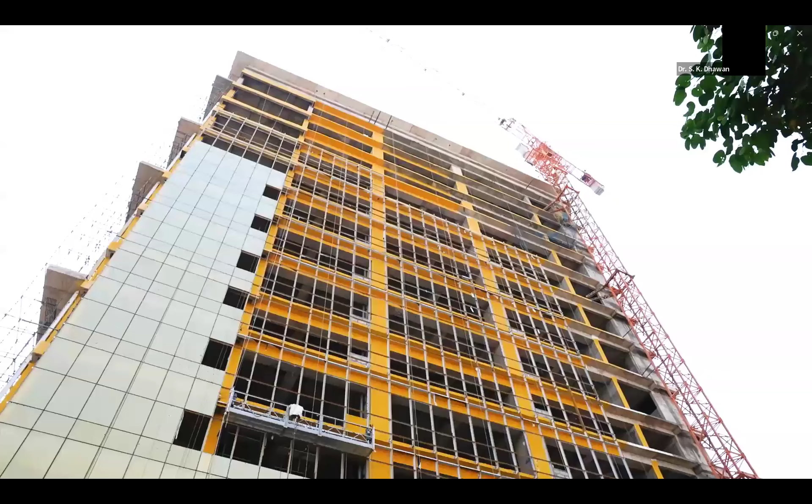The Indian Association of Structural Engineers, also known as IAStructE, was conceptualized and constituted in the year 2002 by a group of senior professional structural engineers from all over the country. IAStructE is registered under the Societies Registration Act 21 of 1860. IAStructE is a national apex body of structural engineers in India with a mission to promote the structural engineering profession and cater to the professional needs of the structural engineering fraternity.

In the short span of two decades, the association has attained an eminent position in the professional field. Its membership is valued very highly in the profession. Since inception, IAStructE has been led by eminent structural engineers like late Shri Mahendra Raj, late Shri Kumar Ghosh, late Shri Subhash Chand Mehrotra, Professor Mahesh Tandon, Shri Manoj Mittal, Professor R. Pradeep Kumar and Shri Alok Bhowmick as its president.

IAStructE is a permanent member of the Engineering Council of India and interacts with the government on professional and policy matters related to civil and structural engineers. To expand its reach, IAStructE has collaboration with various international professional like-minded associations and institutions like IStructE UK and FIB for strengthening global connections and professional exchange.

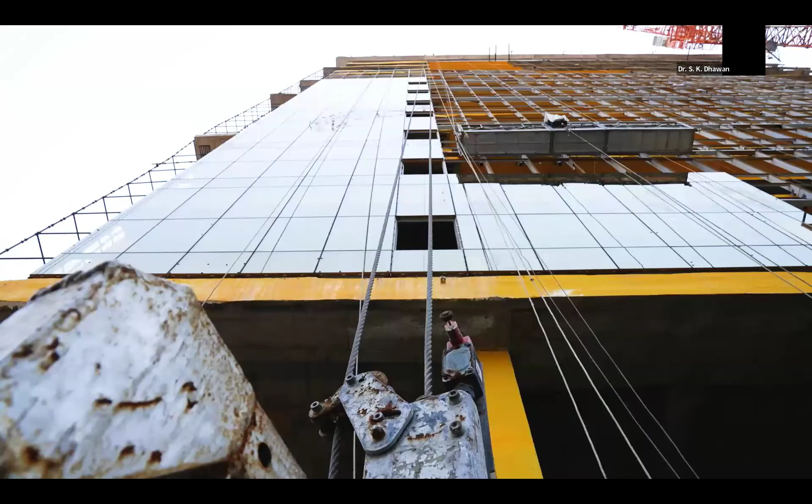IAStructE's prime objective is supporting and protecting the profession of structural engineering by upholding professional standards and acting as a mouthpiece for structural engineers in India. IAStructE endeavors to ensure that its members develop the necessary skills in structural engineering and work to the highest standards by maintaining a commitment to professional ethics and standards.

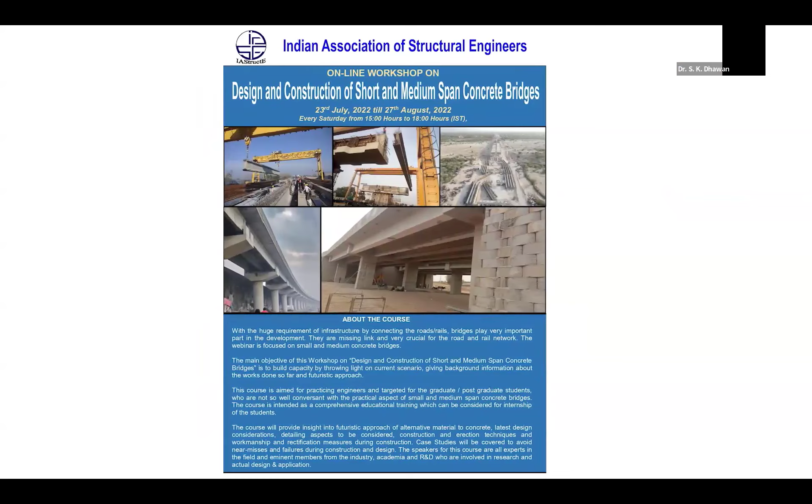IAStructE is actively engaged in organizing several continuing professional development (CPD) courses for structural engineers to help them update their knowledge and advance their career paths. It also conducts refresher courses for young and practicing engineers and student-oriented programs.

Seminars, workshops, conferences, technical lectures and discussions related to the latest technological advancements and case studies are also organized regularly for members to enable them to continuously update their knowledge and skill set by interacting with the best minds from the industry. IAStructE's activities are widely appreciated and known for quality technical content.

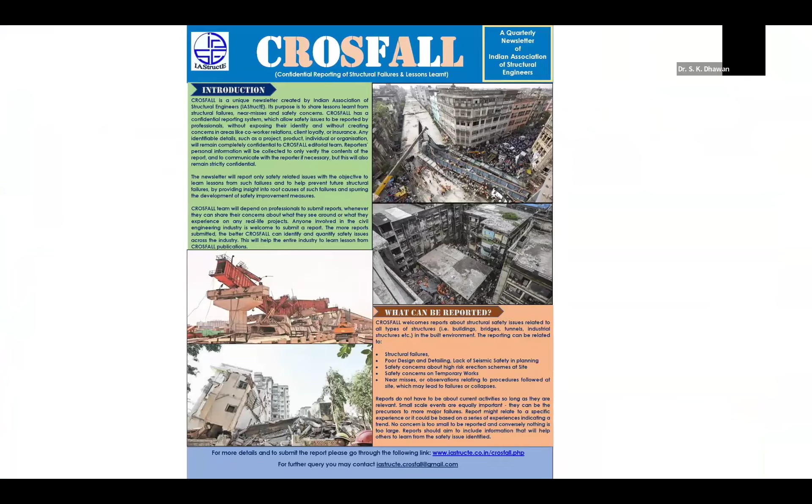IAStructE is also actively engaged in publishing its quarterly journal Structural Engineering Digest (SED), code commentaries, professional guidelines, monthly newsletter, and CROSFALL, a unique quarterly newsletter that confidentially reports structural failures and the lessons learned from them. IAStructE's publications are becoming popular with time.

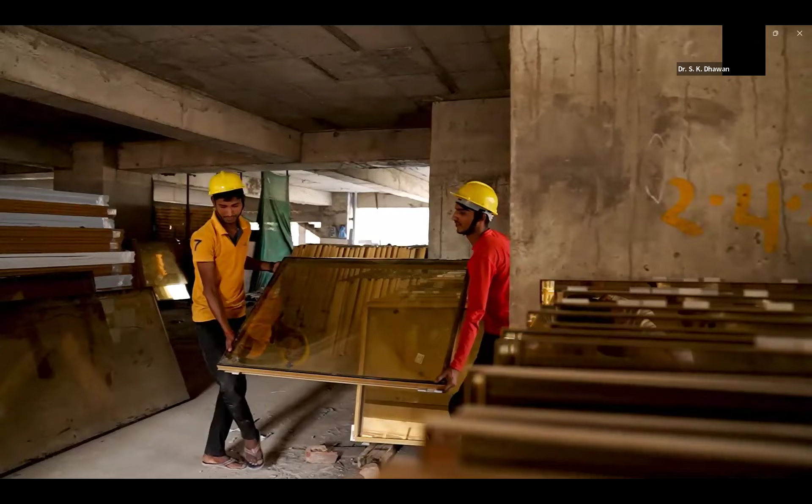IAStructE has representation in various technical committees of BIS and IRC as well. Its members are actively contributing to National Code Formulations.

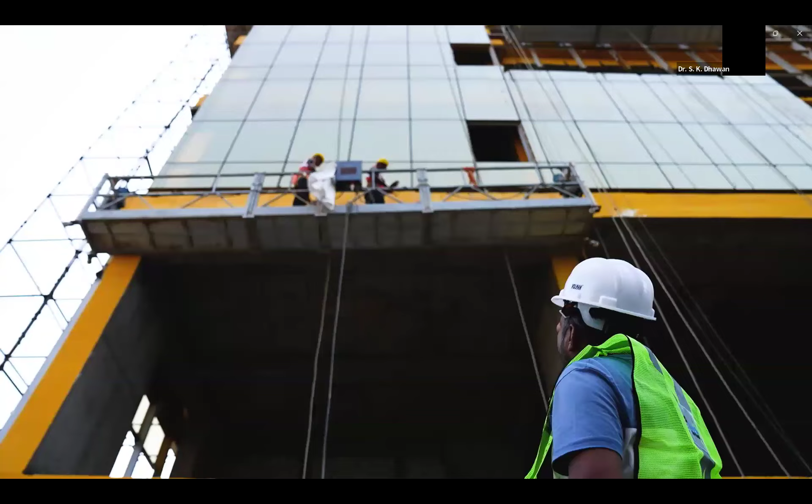In the year 2020, IAStructE started a National Awards competition to stimulate interest in the structural engineering field and to promote innovative thinking and creativity. The awards are presented to the winners in recognition of their outstanding contribution to structural engineering in the categories which include Outstanding Structure, Outstanding Structural Engineer, Outstanding Woman Structural Engineer, Promising Young Structural Engineer, and Best Master's Thesis in Structural Engineering.

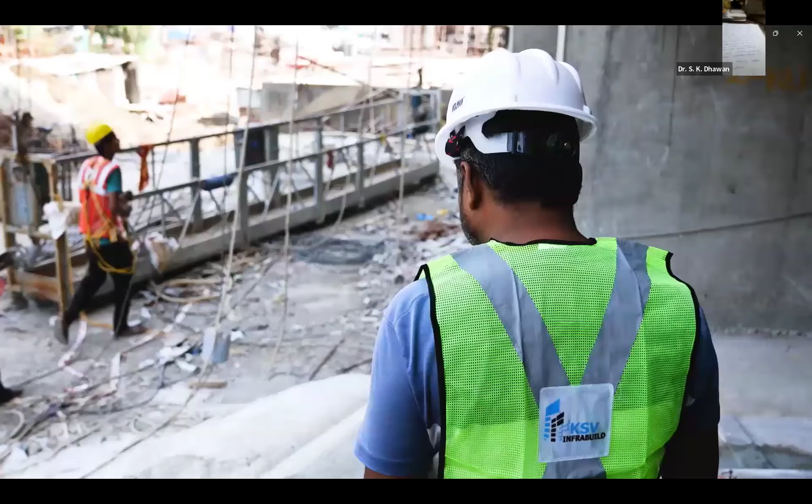Reaffirming its commitment to professional excellence, IAStructE launched the accreditation program in 2023. This flagship initiative empowers practicing engineers to evaluate their competencies, identify growth opportunities, and strengthen the foundation for sustained professional success. IAStructE is currently operating from four regional centers, namely Eastern, Western, Northern, and Southern, having its headquarters in Delhi to inculcate the professional culture and provide handholding to budding engineers.

Joining IAStructE offers exclusive resources, mentorship, and networking with industry leaders. Members enjoy discounted registration for workshops, seminars, and events, along with discounted membership of FIB, opportunities for certification, career guidance, leadership roles, and enhanced professional recognition.

IAStructE has its student chapters in several leading engineering institutions as well. Membership of IAStructE is open to all civil and structural engineers engaged in the structural engineering profession. Members are elected based on their qualifications and experience in different grades as per eligibility requirements prescribed in the bylaws. Each application is carefully scrutinized before electing the members.

More information about IAStructE is available on its website, www.iastructe.co.in.

Hello. Vikas, yes sir, is my voice audible? Please start.

Dear friends, welcome all of you for joining the webinar. Topic of the webinar today is planning and design of underground metro stations using the New Austrian Tunneling Method.

On behalf of the Indian Association of Structural Engineers, we thank Engineer Partha for agreeing to present on the above subject. Engineer Partha graduated from the very eminent college, Shibpur Bengal Engineering College, in 1997, and thereafter, as a practicing engineer, he did his MTech from IIT Delhi in structural engineering.

He has over 28 years of experience in planning and design of bridges, metro systems, and complex structures. Currently, he is Director Technical,

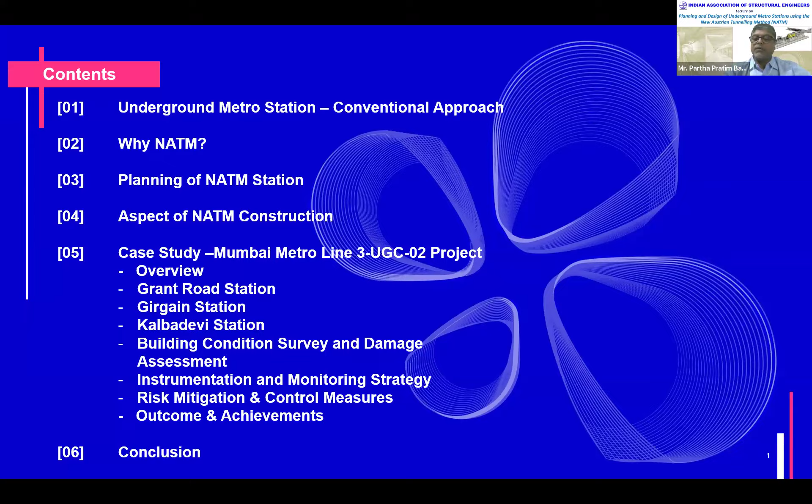So I'll go for a case study where Mumbai Metro Line 3 - there is a particular project where we are the consultant, detailed design consultant. We'll go to a case study, and after that the conclusion.

Coming to underground metro station conventional approach, basically conventional construction and planning of underground station is done using cut and cover construction technique, either top down or bottom up construction.

So this is underground stations - a typical picture of the construction technique of a normal underground station. What has been done - we need to cut this and then make the station and fill it up.

This is the conventional approach, but this can be done with top down or bottom up, depending upon whether it is an on-road station or off-road station, or as per the geological condition at the site. Generally, on-road stations are done with top down to minimize disruption of traffic.

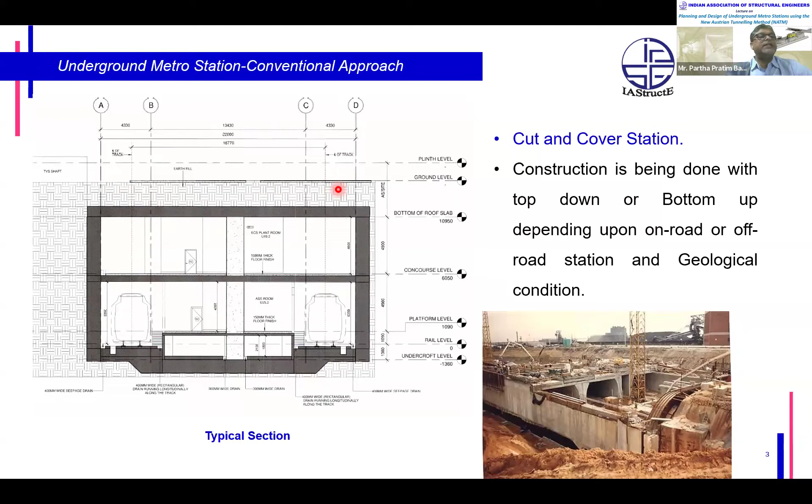So this is a top down construction approach, and bottom up method is done where the rocky strata is available at shallow depth - that is, if at the concourse level we are getting the rock at higher level, then bottom up construction, or if it is an off-road station, then we can go for bottom up construction.

But generally in off-road stations also, we don't prefer to go with bottom up construction, because if water level is high, then we need to put a secondary pile retaining system and strutting system, which has additional cost to the project.

So in case of top down construction, it's very easy. First we have to do the diaphragm wall, and then plunge column, pile and plunge column to support, then excavate the top portion up to the bottom of the top slab, construct the top slab, then excavate up to the concourse level, cast the concourse level,

then come to the bottom of the base level, excavate up to base level. And if tension pile is required, we need to provide it - tension pile is mostly required for buoyancy. In case of top down construction, generally tension pile is not common, because the diaphragm wall and the pile below the plunge column can take the tension in general, unless the station depth is very high.

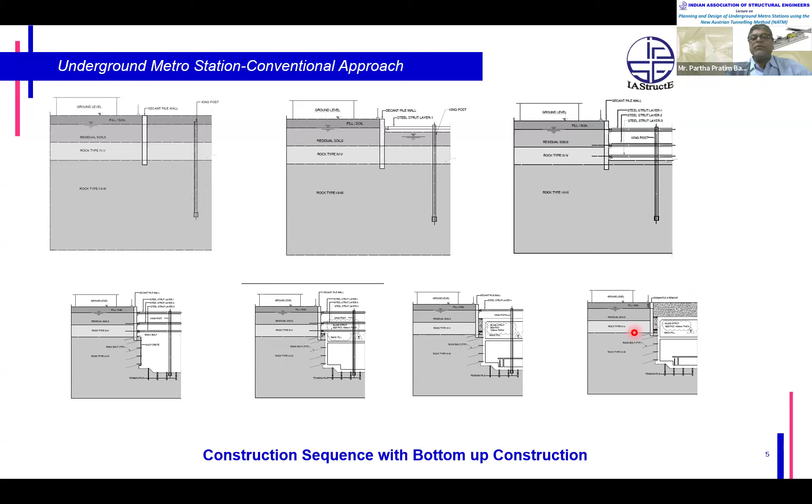But I just want to show first conventional, then NATM. Now let us understand the key factors that drive the adoption of NATM in urban underground construction.

Basically, NATM is not a new method. It is a very old method used for tunneling in rock mountains, like Himalayan tunneling in Kashmir, and NATM has been used everywhere, not only in the Himalayas, for road tunnels and railway tunnels. There is no issue with that.

In general, for underground metro construction, since it is urbanized, and we require very fast construction, that's why TBM tunnel, mechanized tunnel boring machine, has been used. It is very popular. So that's why in tunnels we don't use NATM in urban environments in general. In general, I am telling in general.

But now we have to see why NATM is proposed in urban construction. Basically, NATM is based on the principle of utilizing the inherent strength of the surrounding ground and supporting it through a controlled and sequential excavation process. This is generally the principle of NATM.

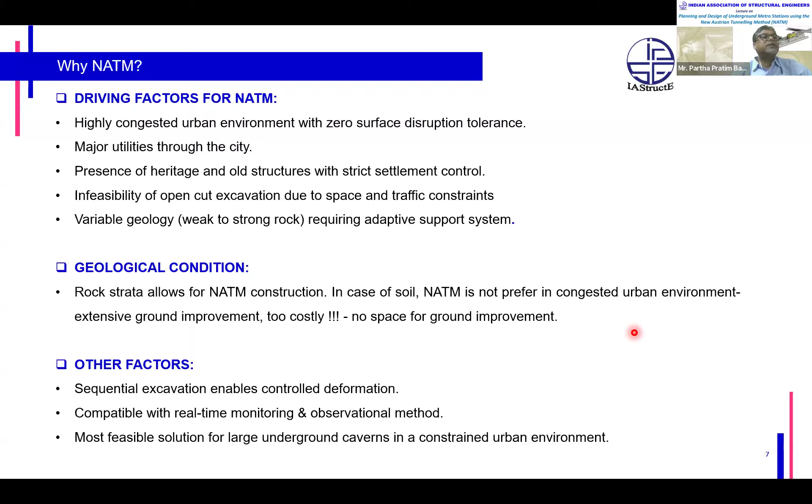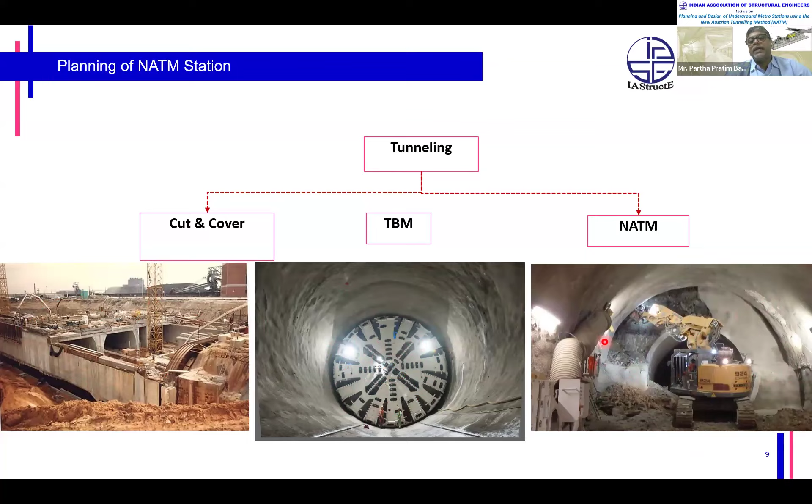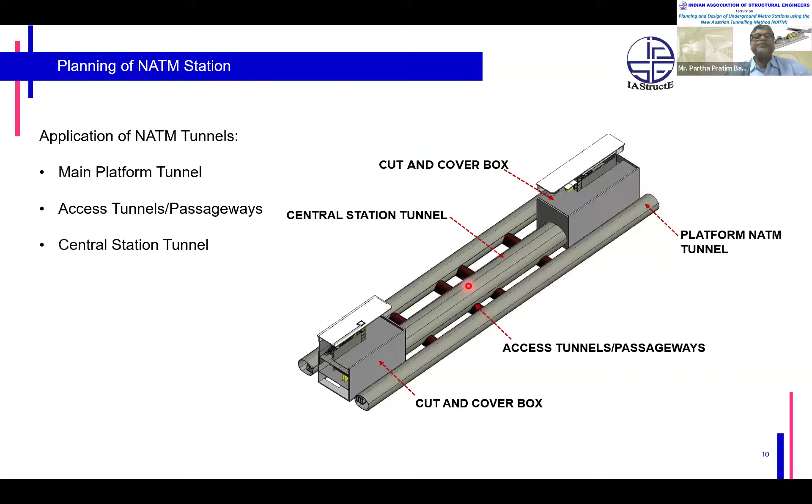So this is the main platform tunnel, and this is a photo where this has already been done - one station has been done with NATM. It is not in India, it is from outside India, and this is the platform tunnel where all the utilities have been provided.

So this particular thing is entirely from a services and architectural point of view, but yes, structural or geotechnical engineers - another thing I want to emphasize: NATM design is a part of soil-structure interaction. So one needs geotechnical knowledge also and structural knowledge also. Both blended together, structure and geotech, will make a very good NATM or tunnel engineer.

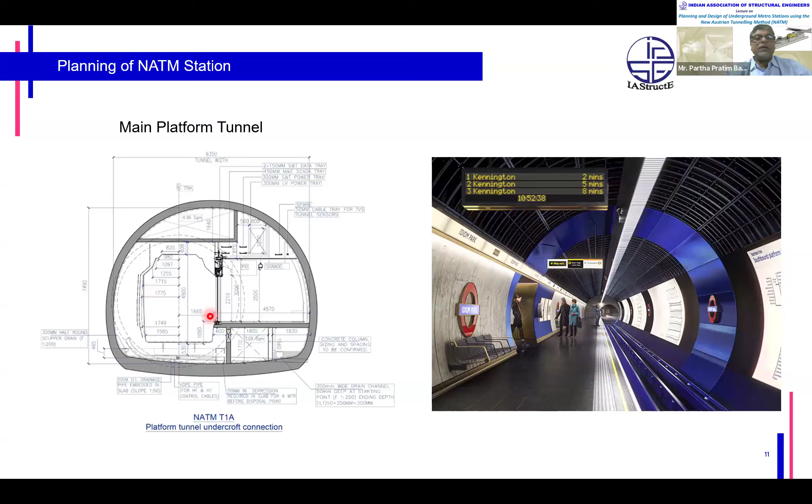So this is the cross section. What we have seen is the cross section at the adit location. These two are platform tunnels, and this is the central tunnel, and these are the adit locations. Here you can see this connection at undercroft level for services has also been shown in this picture.

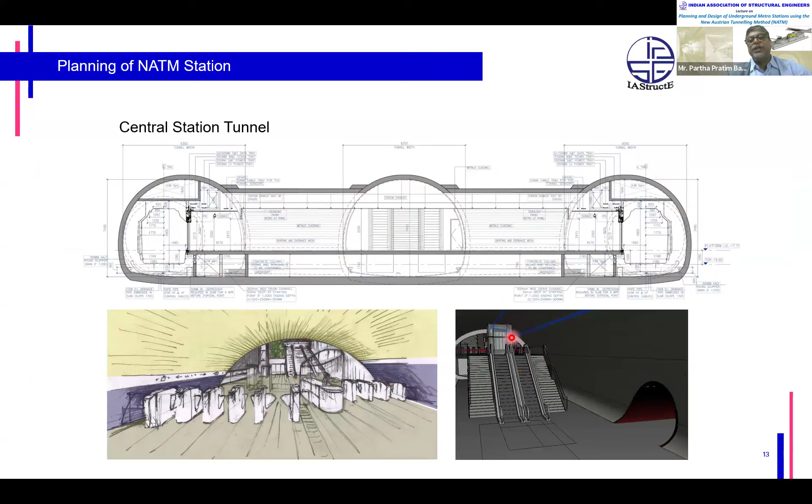So this is the concept picture prepared by the architect, and this is a 3D BIM model view just to show how the station has been conceptualized. So this you can see is a platform.

We tried this as a TBM tunnel. We first tried with a very small area, so that excavation will be lesser, cost will be lesser, and construction-wise it's better. But you can see it is insufficient OTE area. OTE is required for ventilation purpose of the station and the tunnel, and here no space is available. So we need to increase this tunneling section.

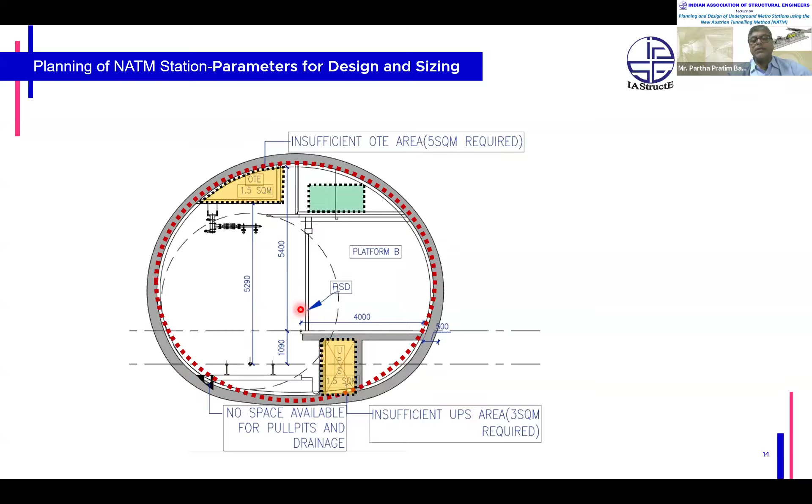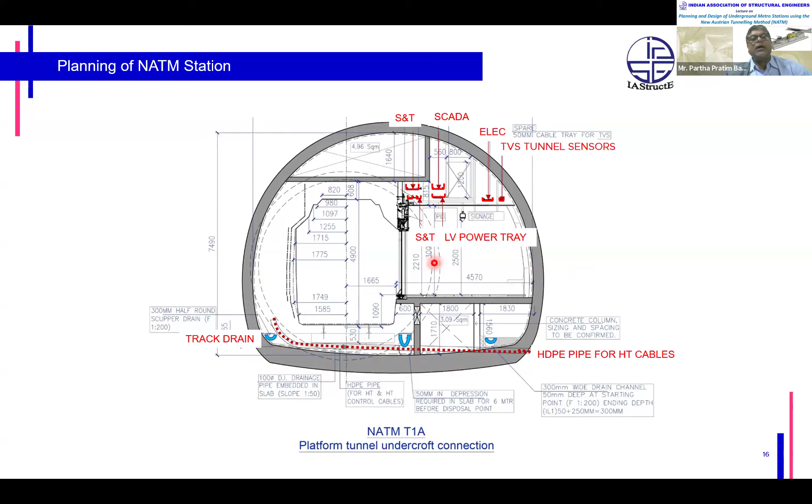So now coming to another section, you can see the section has been increased, and we could use all the equipment. The OTE duct area is sufficient. Whatever equipment is required, whatever the services requirement, drain area, all has been provided with this NATM. But it is a bigger one than what we started with. So you can see S&T, electrical, SCADA, power supply, track drainage, everything has been accommodated in this NATM platform tunnel.

So now, as I say, the design cannot be isolated without the sequencing of the NATM construction. So we'll discuss the NATM construction.

So now the construction basically begins with very careful excavation in small sections. If you can see, first this was the TBM tunnel which has gone through. It helps to get this much excavation done, and after that we are enlarging this with the NATM method. So here first, generally we construct with the heading and benching method. So this is heading, and this much portion is called benching. This is the geometry of the complete section, and this is the geometry of the heading section.

You can see this primary support system - we provide it immediately after excavation. Primary support system is mainly shotcrete, wire mesh, rock bolt, and sometimes steel ribs or lattice girder. So here you can see there is a lattice girder provided here, inside the shotcrete. It basically gives the strength of the primary liner.

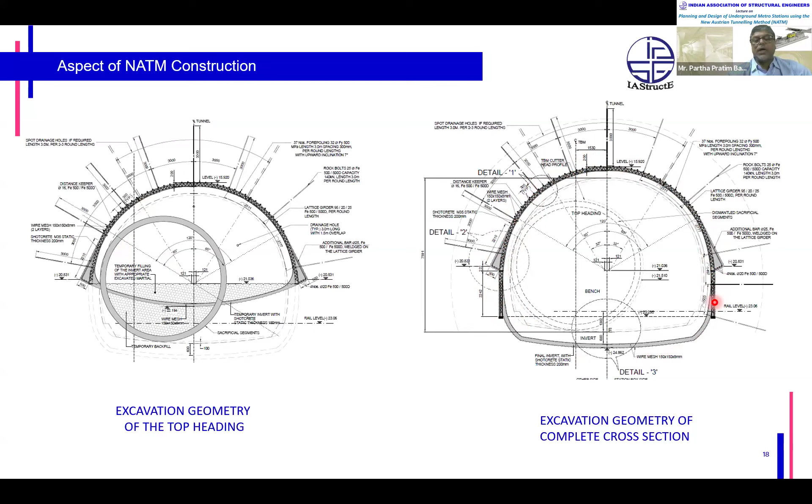Secondary lining generally becomes effective if the temporary lining fails. Basically, if you look into that, temporary lining is good enough to take care of the ground load, but secondary lining has been provided for durability purposes, because people have an apprehension that shotcrete may not remain intact up to the service life, that is 120 years.

So I'll go to the case study now for Mumbai. With this background, I will go for a case study, Mumbai Metro Line 3 UGC02 project. First, let's go to the overview. Basically, this is a project corridor from Colaba to Bandra. Total length of the project is 33.5 kilometer, and total number of stations is 27, and the client is Mumbai Metro Rail Corporation, MMRCL. Our part is UGC02. This red portion is our portion. There are 4 stations, namely CST, Kalbadevi, Girgaon, and Grant Road station.

So what is the scope? Scope is for UGC02. As I told, these are the scope: this is a 4.05 kilometer tunnel. Total stations 4, number of crossovers 1, and number of cross passages is 7. Cross passages fulfill the fire evacuation requirement between the two tunnels, so that if there is a fire in a single tunnel, evacuation can be done through the other tunnel. Basically it is the most complex underground metro alignment in India, with its heritage buildings.

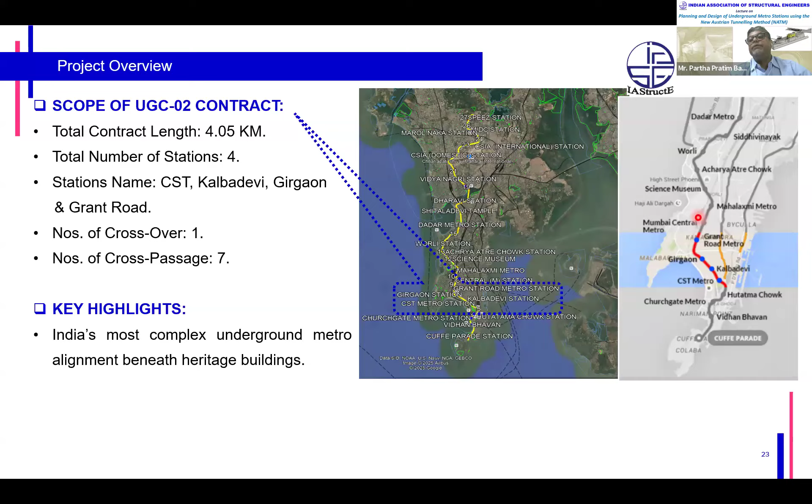I would say here there are only 2 TBMs operational for this single project, because in between there is no space to launch or retrieve the TBM. So here, from CST station, the TBM has been launched, and it has been retrieved at Mumbai Central Station for this project UGC2.

So why is the Line 3 metro project unique? To begin with, it is basically a 33.5 kilometer fully underground corridor, which is the first project of this scale in India, fully underground. The alignment passes through highly congested urban areas, including zones with seismic considerations and sensitive structures.

Basically, construction is extremely challenging in terms of safety and settlement control.

Another achievement is that 17 TBMs were in simultaneous operation, which is a record in Indian tunnel history for these projects. There is an integration of different construction methodologies like TBM, NATM, and cut and cover, depending on site conditions. Additionally, advanced settlement monitoring systems and specialized heritage protection measures were implemented to ensure existing structures remain unaffected. Overall, this project represents a benchmark in engineering complexity, planning, and execution in urban underground construction.

So now coming to our UGC02 project, this package also has its own distinct or critical challenges. The project corridor was extremely congested with very limited working space, significantly restricting construction activity. Geologically, the presence of weak breccia rock with low strength and poor to fair rock mass quality added to the complexity of construction and support design.

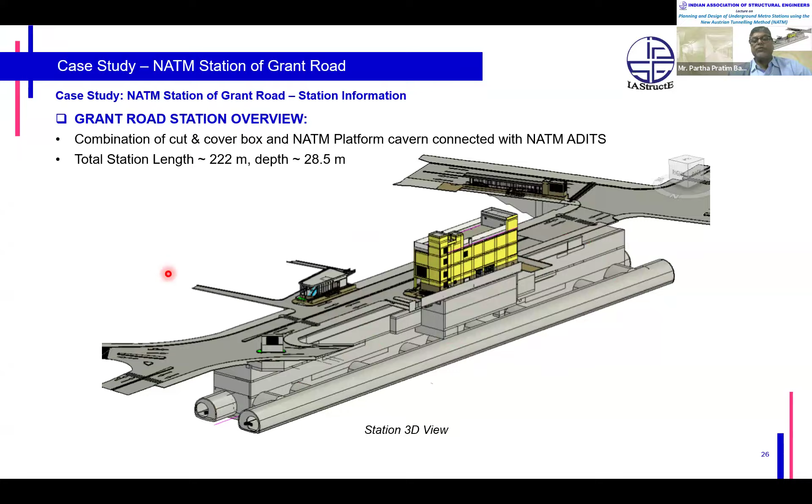Coming first to Grant Road Station, here also NATM has several differences. This is the station 3D view, which is a BIM model view. Here the station is a combination of cut and cover box and NATM platform caverns connected with NATM adits. This is the proposal - total length of the station is 222 meters, and the depth is also very high, at 28.5 meters.

So here's the cross section of the station. You can see 50% has been constructed using cut and cover, and this cavern, another platform, has been constructed using the NATM cavern.

Because if you look into this, there are existing buildings, and the road availability is such that - in general, in a conventional system, the inner width of the cut and cover box girder is around 18 to 22-23 meters, depending on several conditions like ridership and interchange. Everything comes into the planning.

So here, what happens is we could only make a box of 16 meters or 15 meters. In this 16 meter box, we cannot accommodate both the station staircase, escalator, and all the services rooms. So we have to go - this is the box, and this is the NATM. So this is one type of station.

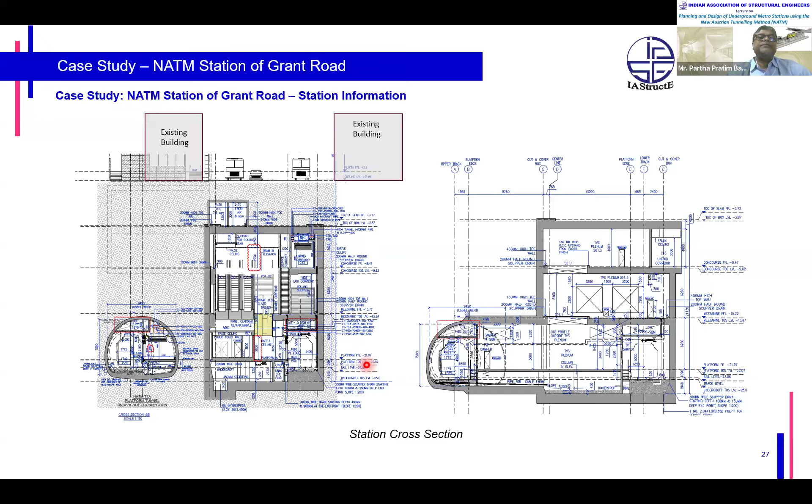This portion has been made with cut and cover. This side is a cut and cover station, and this part has been planned in NATM cavern. These are the cross sections I mentioned from the cut and cover portion to the NATM portion, and the cavern section has been shown in cross section here so that you can get a clear idea. You can see the caverns are different sizes because of requirements from services, architecture, and all the requirements there.

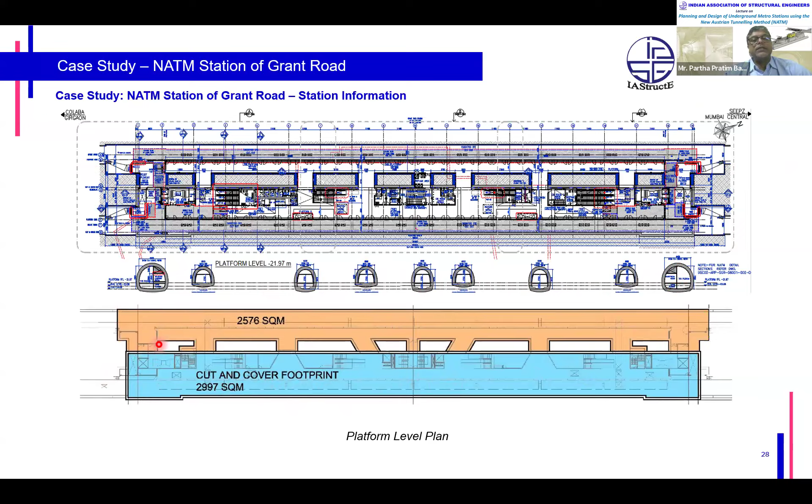So you can see the complexity in the planning of the station, and the complexity of the basically unrestrained wall height in the stations.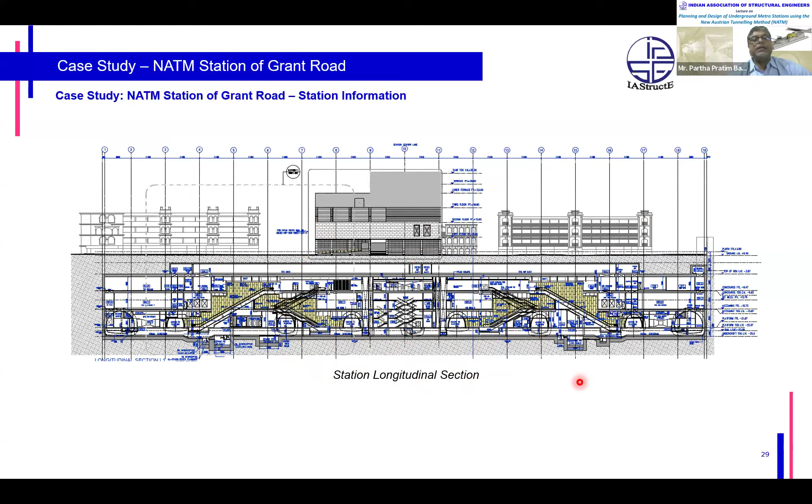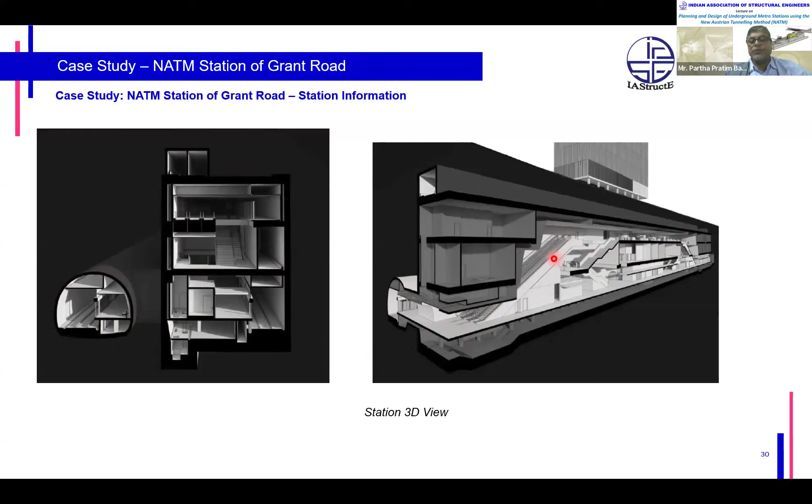So now coming to the analysis and design of NATM. Basically this NATM has been designed as a finite element model. Basically, NATM is a long tunnel, a long structure with constant cross section, like our retaining wall, with loading along its length. So the deformation in the longitudinal direction of the tunnel is very negligible compared to the deformation in the radial direction, that is perpendicular to the excavation.

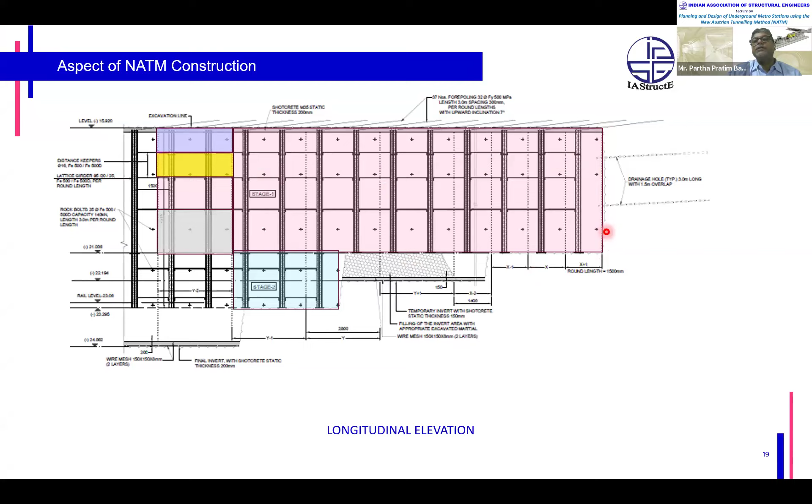Therefore it is generally analyzed as a two-dimensional plane strain problem for the cross section, and the effect of longitudinal advancement, that is the face stability, is discussed with an empirical formula provided in several guidelines based on experienced persons. 3D modeling is a better analytical model to assess and predict the face stability issue, but in general, the plane strain problem with a 2D model is good enough.

Standards have been followed, that is the IS code for design, ITA International Tunnelling Association, FHWA, Eurocode, and CIRIA has been extensively used when doing the modeling, design, and behavior analysis.

So what are the modeling steps? There is temporary work, that is secant pile has been modeled, and the TBM passes through. As there is no space for TBM retrieval and launching, the TBM has been retrieved and it has gone. Here the tunnel segment, temporary segment has been done with SFRC rings, so that later we can easily break this segment rings.

After open excavation, we construct the base slab, mezzanine slab, then de-strutting of the strut has been provided. Then after going to mezzanine, we started the NATM construction. We cast first the primary lining, then the secondary or permanent lining after completion of the primary lining, and sequentially the construction above the mezzanine level has been done in parallel with this NATM construction.

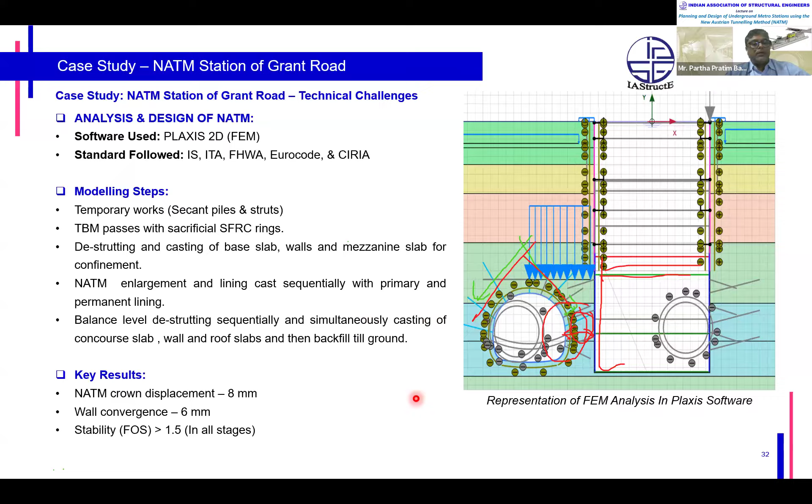Now, sorry, this has come.

Coming to the primary support, this is the Grant Road primary support. As I showed earlier, this is poor quality rock from the Grant Road section. Here, forepoling has been provided with rock bolt. The thickness of the shotcrete is 200 mm, and lattice girder has been provided at a spacing of 1 meter to 1.25 meter.

So this is the condition, and drainage pipes have been provided to drain out the water from the ground around the primary lining, so that the primary lining need not be designed for groundwater also. As I mentioned, recharging also needs to be done from the top to mitigate any settlement arising from the lowering of the groundwater.

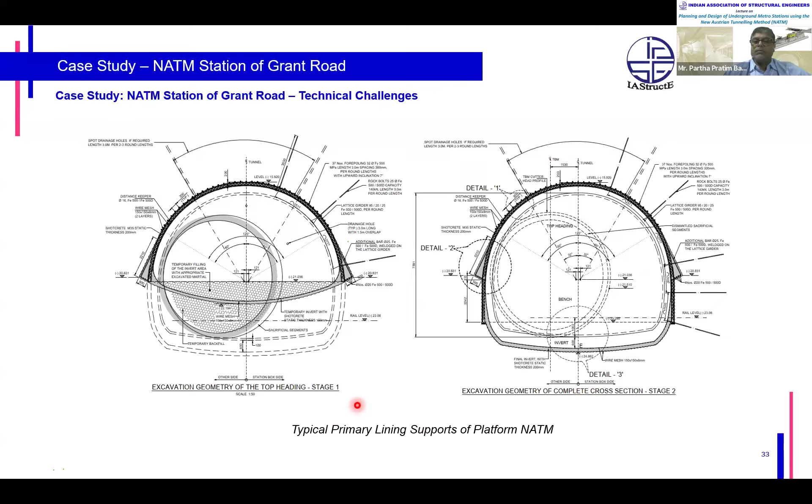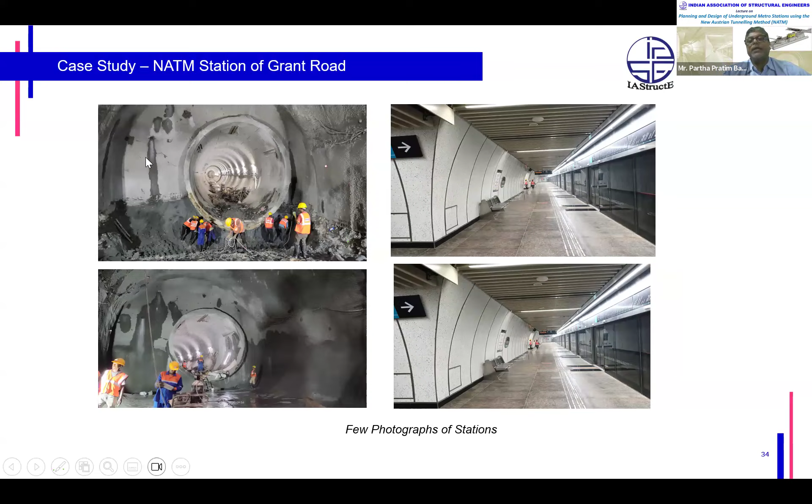So these are some construction photographs of the station, from the NATM construction stage. You can see this TBM tunnel, then they have a face, and from the face they have started the NATM. And these are the photographs after completion of the station, including the long cutout as I was telling you during the explanation.

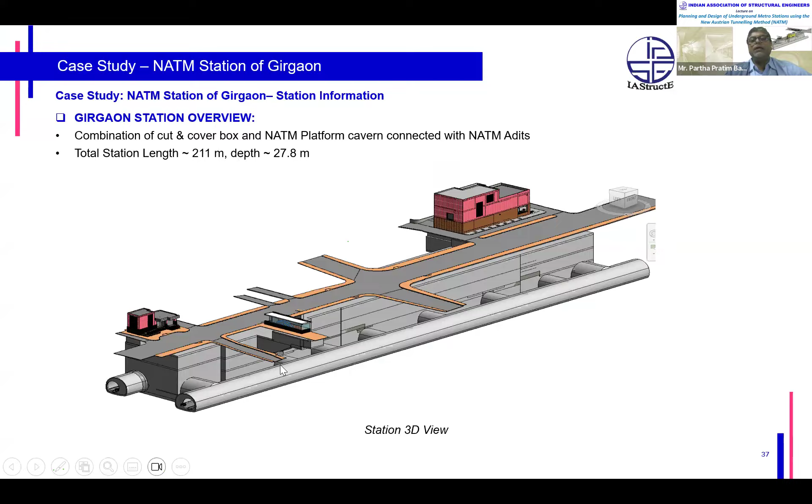Now coming to the Girgaon station. This is the 3D view of the Girgaon station. In Girgaon, the station is 211 meters and depth is 28 meters. Here, basically it is also a combination of cut and cover box and NATM cavern. There are 2 caverns and 1 central cut and cover box. So coming to this, if you look into it here.

If you look at this, this is the road. The road width is very less here compared to Grant Road. At Grant Road we could make a 16-17 meter wide station, but here with cut and cover we can make about 13 meters only, and in 13 meters one NATM cannot be provided.

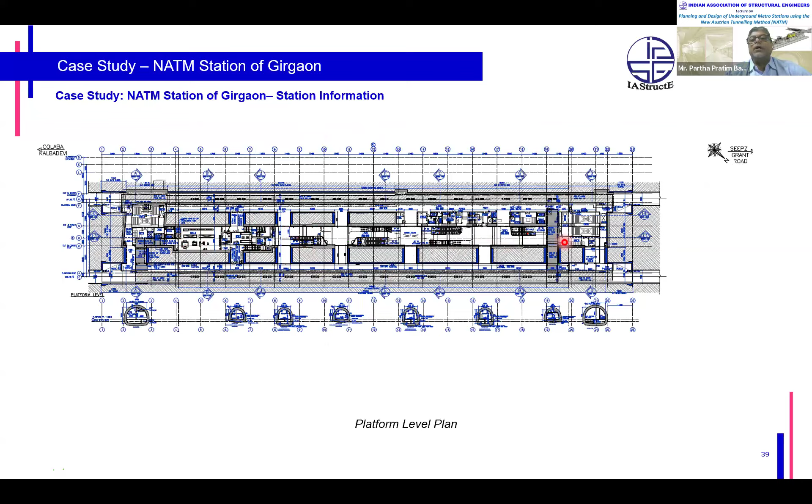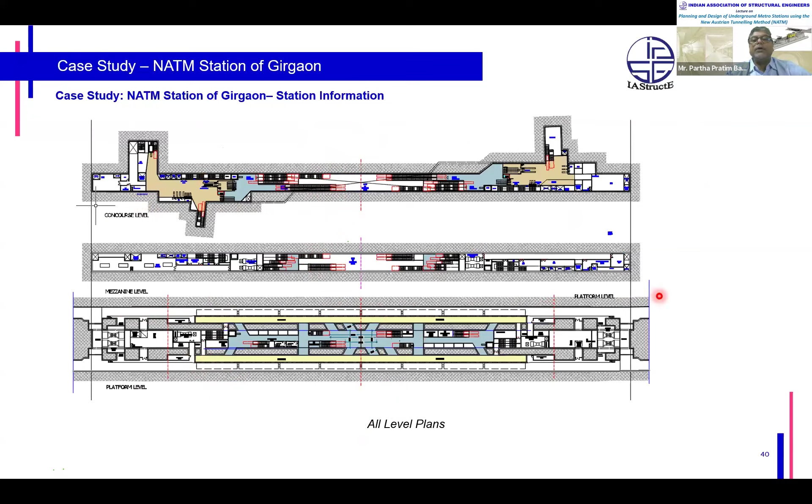So this is the platform level plan. You can see these 2 are NATM caverns, and this much portion is the cut and cover station. If we look at all the level plans, the concourse level is a very narrow cut and cover, mezzanine is also very narrow cut and cover, and at the platform level you can see it is wider with the help of the NATM tunnel.

So here also, this is a longitudinal section. You can see there is a big cutout here. This portion has been highlighted. You can see the cutout provided by the architect here, and he was too adamant - from an aesthetic point of view this should be there. It looks nice; when I visited the station, I would say it looks really elegant.

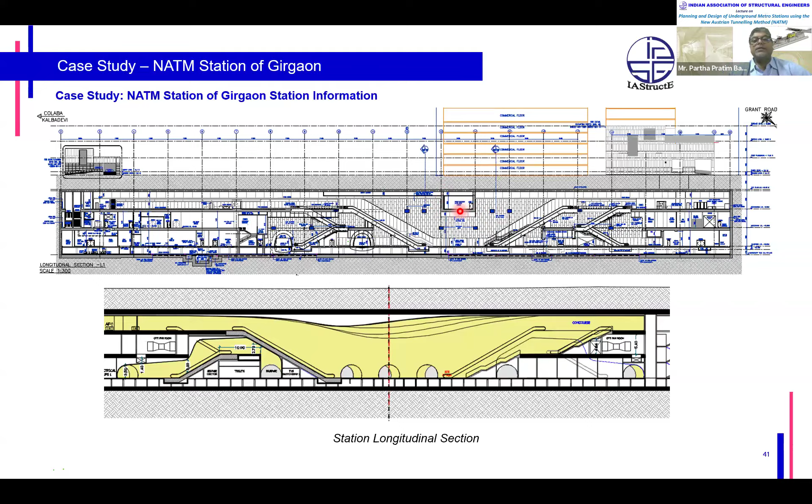After a lot of fighting with the architect, we could get some support here - you can see some support has been given. Some of the slab he has provided to us so that we can make this happen, so the structural design can be economized.

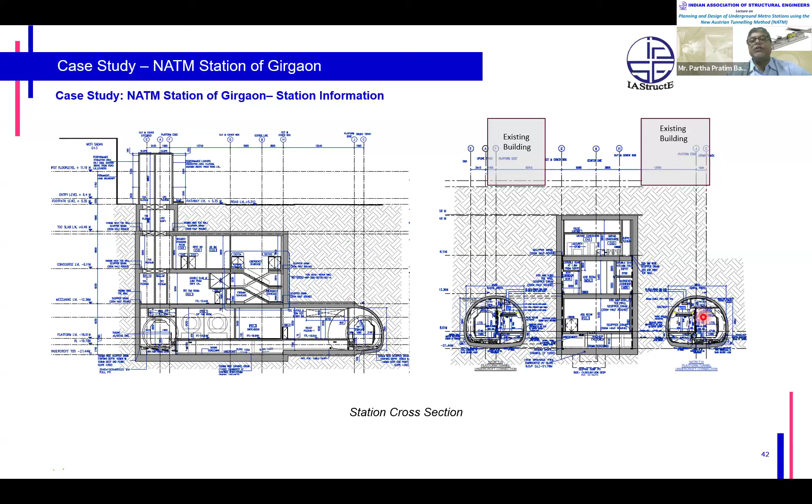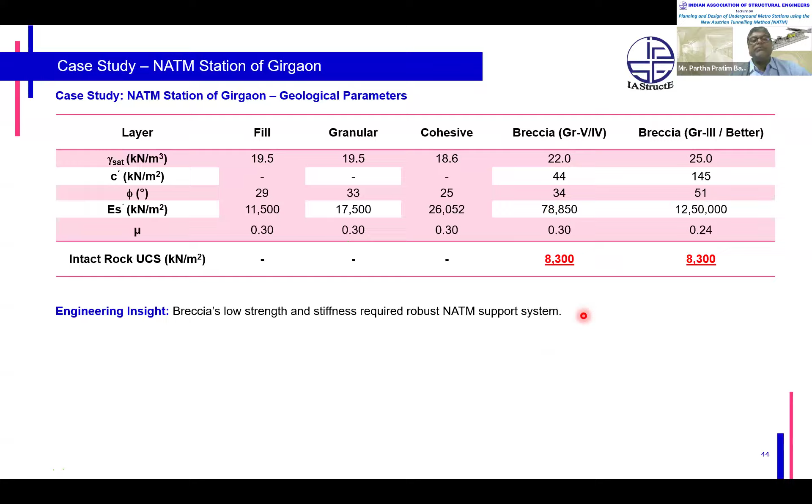In terms of geology here also, Breccia and grade 4, 5, and grade 3 and better rock is available, similar to the Grant Road station. But here the rock is of slightly better quality than Grant Road in terms of UCS and elasticity of the rock, so the problem of analysis and design is quite lesser.

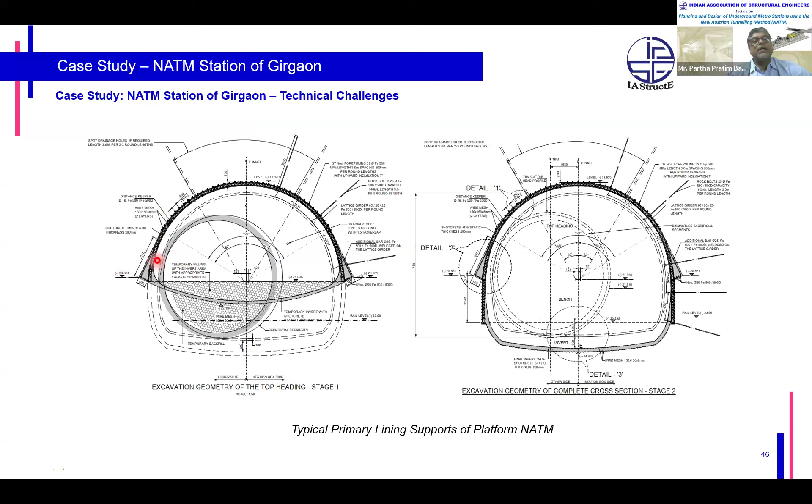The primary support lining is similar to Grant Road, only the lattice girder spacing differs - where in Grant Road it was 1.25 meter, here it is 1.5 meter center to center. That's the only difference. Otherwise, all the rock bolt, fore-poling, everything is similar in this case.

Another point I didn't discuss is the adit portion in the Girgaon station. Here you can see this is the main NATM tunnel, and this is the adit or cross passage, whatever you can call it. This is the NATM platform tunnel, and this is the adit.

In terms of design of NATM stations, we can basically think of it as a plane strain problem, because it is a long tunnel. But design issue and detailing issue arise in the connection between NATM to NATM. This is the NATM to NATM connection, or NATM to TBM, because after this NATM there will be the TBM - after the station is completed, there will be TBM. So this connection is critical in terms of design and detailing, so designers should carefully detail it.

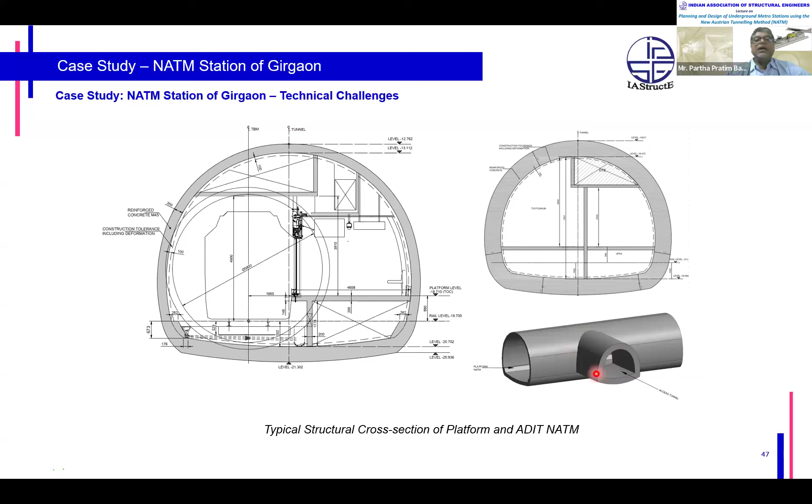In this case, 3D modeling will actually show the real behavior of this junction in terms of the analysis and design of the adit. But since 3D is very cumbersome, designers analyze both things into two different 2D models and superimpose both results, providing some margin in the design for this junction point.

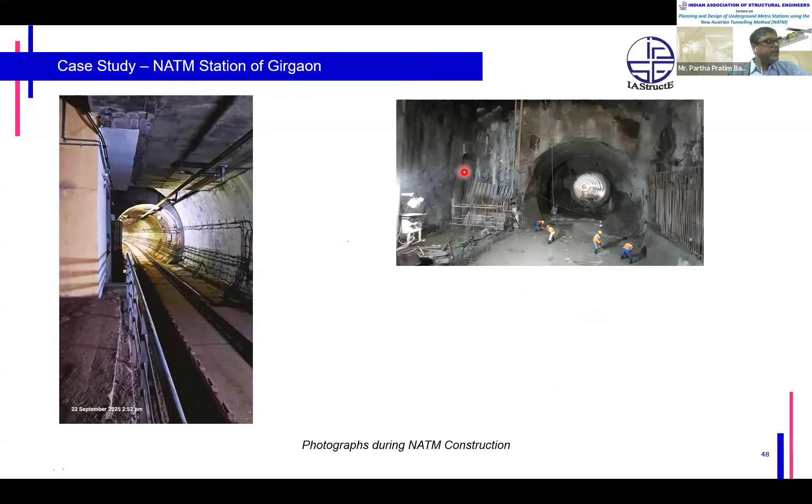Coming to these are some photographs of NATM construction. You can see what I am telling - this is the tunnel portion, and tunnel and NATM. This is the junction portion, and this is the NATM portion. This is the NATM tunnel construction. During construction, they first make this small NATM, then the big NATM has been done. And these are some photographs of completed work.

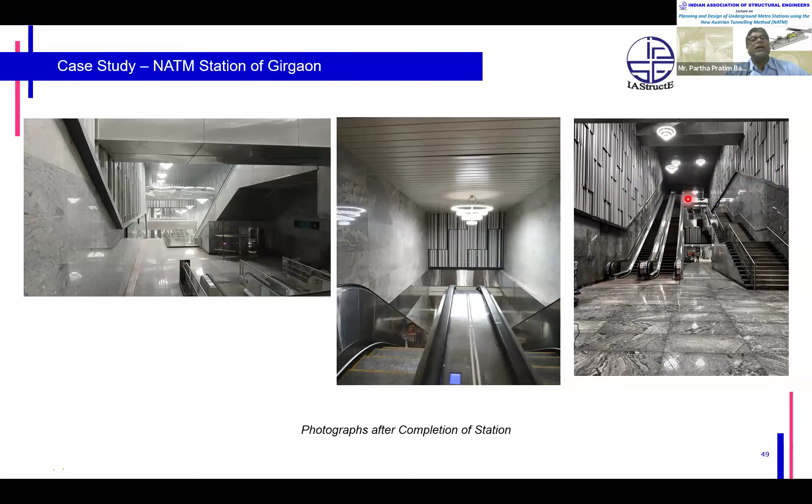This is the long cutout portion - you can see how elegant it is, like a real picture. I took this picture last December or January, and you can see the finishing and everything looks like a 5-star hotel.

Now coming to Kalbadevi station, this is also a separate station, as I explained in the first slide. Here there are 2 NATM caverns and a central cavern, and a small cut-and-cover portion. I didn't mention in Girgaon station that in some portion, there is a 30-story multi-story building also planned over the cut-and-cover portion of one portion of the tunnel. I forgot to mention this.

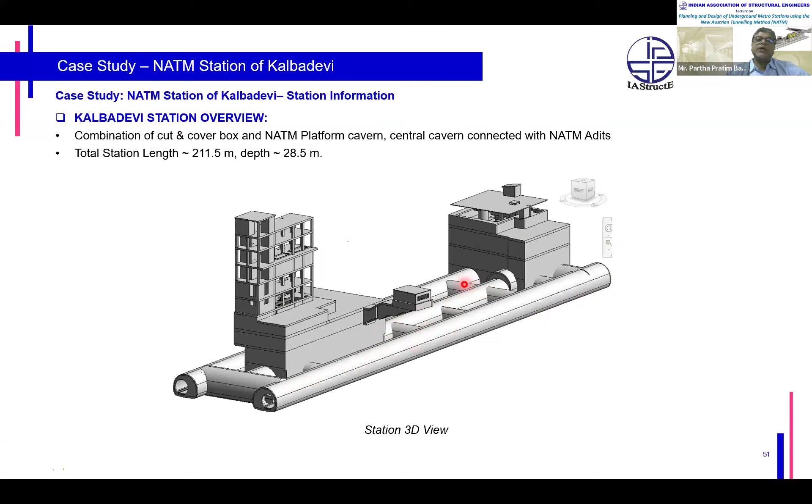Here also this is the station 3D view. Whether you can understand - this is the cut-and-cover portion, 2 small boxes, and these are the 3. This is the central cavern, and these two are the platform caverns.

So coming to here, I am telling about these boxes - these are the boxes where they get the places, they have put the boxes. This box in the initial stage was bigger, but this project was delayed due to one heritage religious structure here, and it went into litigation in court, which took too much time, and we ultimately needed to make the box smaller here to accommodate.

It is also, I would say, a fantastic job by the architect here. Not only the structural and geotechnical engineer, but architects and our services engineers have done well on all fronts. Not only us, but the client, the GC, all have done a very good job to make these boxes much smaller compared to the requirement.

Here you can see one NATM platform, another NATM platform, and the central cavern. You can see this entire NATM, as with Grant Road and Girgaon, has been constructed below the existing building. I will show the buildings also - I think it is already 6:10.

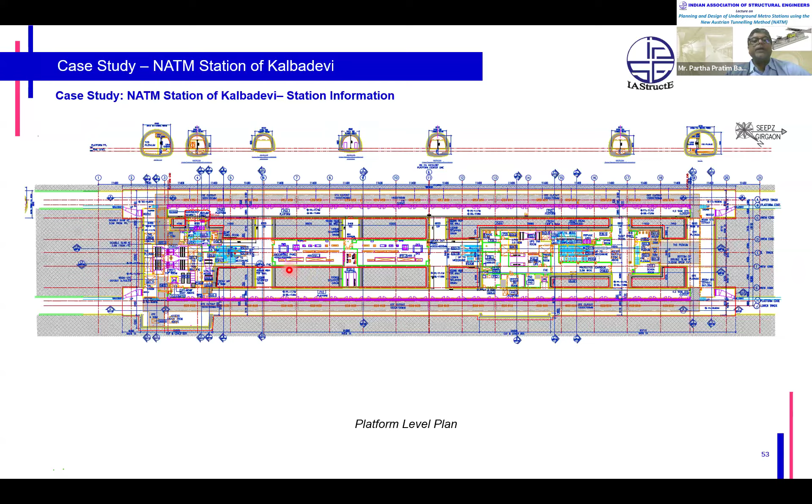I need to go a little fast. So this is the cut-and-cover portion, and these 3 are the platform level plan. I have already explained how it looks. This is the station longitudinal section, where this is the one central cavern, and these are the cut-and-cover, and these are the adit or cross passage connecting the central portion to the platform.

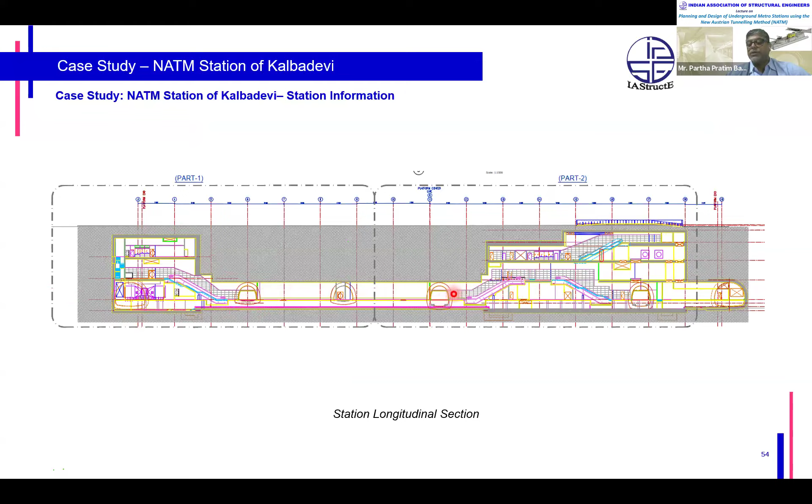So this is the cross section, I have already shown this at the initial time. This is the cross section with a cut-and-cover and 2 NATM caverns. I'm not going further into this - this is one station 3D view.

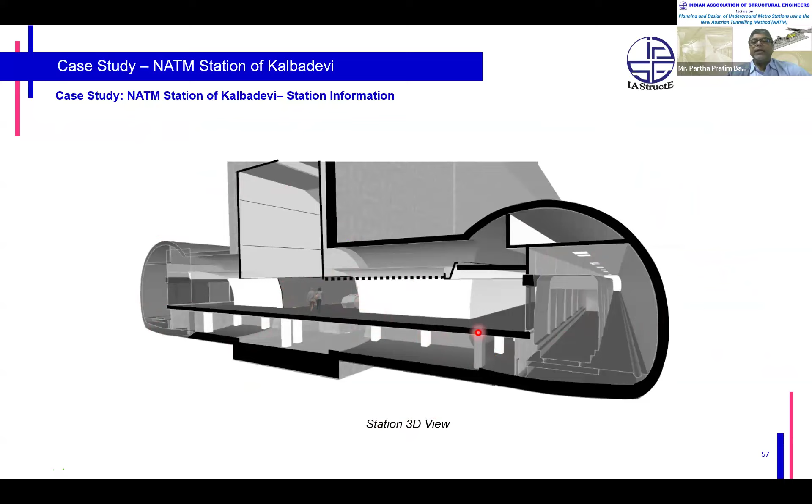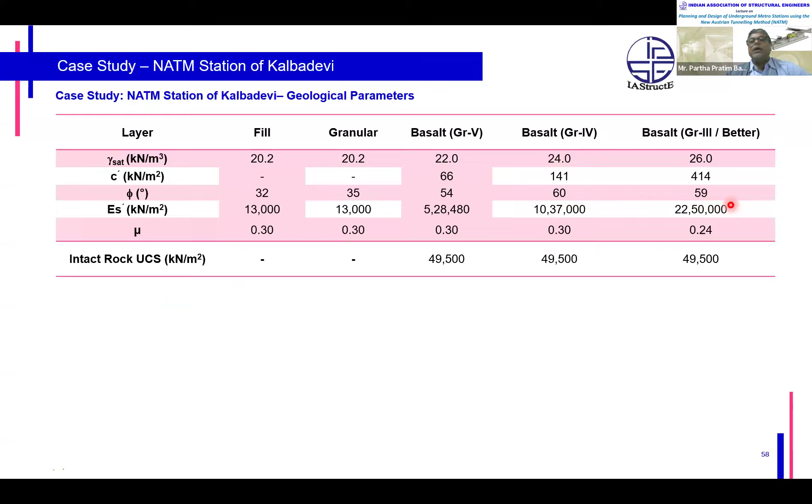So this is one NATM, this is another NATM, another NATM, and then the cross NATM also. In case of geological condition, here the geology is better. We get the basalt with a good intact UCS of 49.5, and the E value is also good for the rock. So these are all the same NATM excavation.

Here all the 3 NATM have been modeled the same way with a sequential excavation. Sequential excavation has been modeled in the Plaxis software. People can use RS also, FLAC also, depending upon their availability and the engineer's competence on the software.

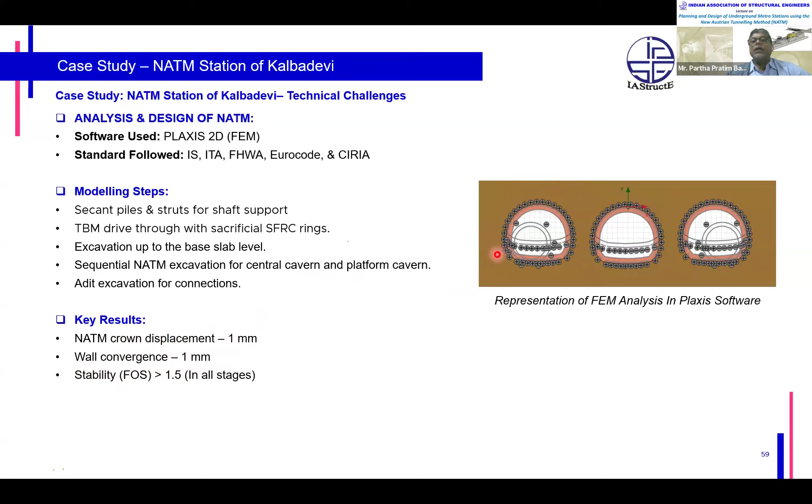Okay, so here you can see the wall convergence and crown settlement of NATM is very less because of the good quality rock. Rock is self-sufficient to take care of the load coming on the excavation surface.

So here you can see there is no lattice girder, no forepoling in terms of primary support—only rock bolt and shotcrete. And shotcrete is also very less actually. I think 75 mm shotcrete has been provided, whereas in Grant Road and Girgaon 200 mm shotcrete has been provided. And I want to tell you rock bolt has been provided only if there is any suppose rock mass that is loose.

You have a rock mass there, so it can come out. So you are stitching these rock masses so that this should not come out during the excavation.

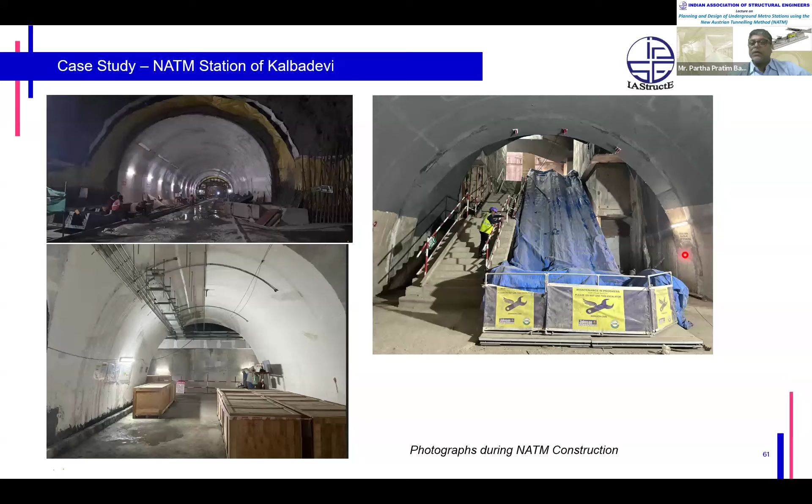So these are the few construction sequences. This is a construction area where cut and cover and NATM is matching. These are the completed stations.

And coming to building condition survey, I'll only show a few buildings. There are several buildings there—heritage building, dilapidated building, and very bad type of building.

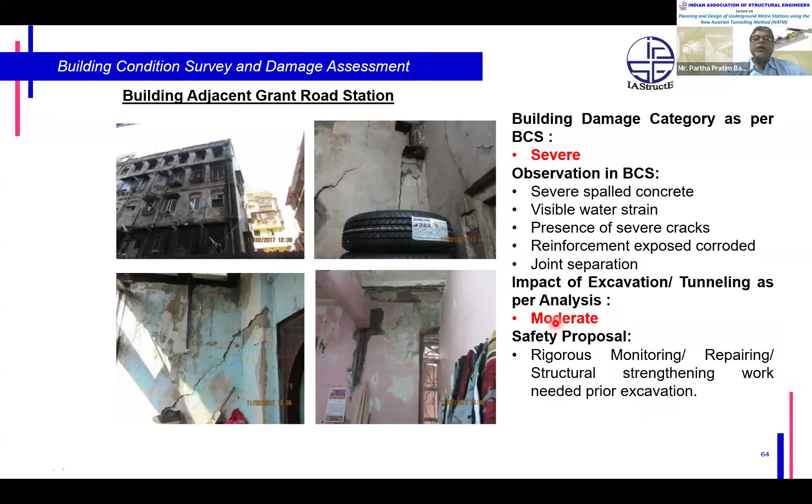We analyzed, due to the excavation and tunneling, what is the impact of the tunneling on the building, which is moderate. So severe becomes moderate, so there is some safety proposal. We propose rigorous monitoring, repairing, and structural strengthening work before excavation has started. But the problem is that severe plus moderate is there—basically severe plus moderate will make this building into the very severe category.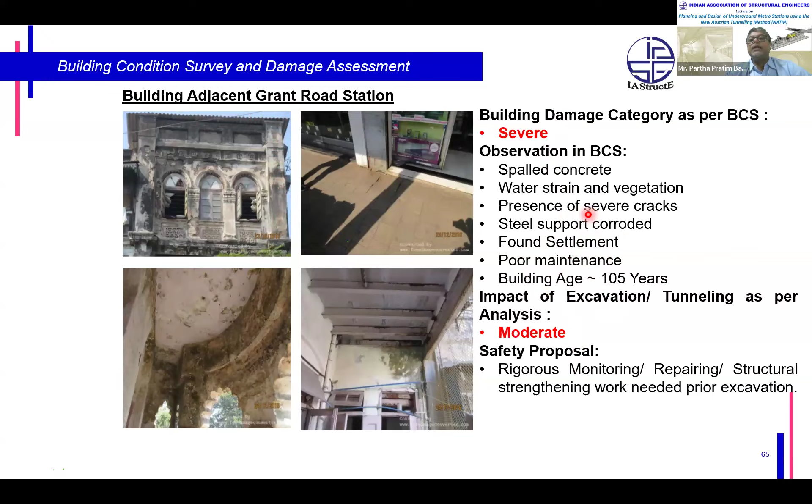So another building, you can see this building—it's not in very good shape. I didn't name the building, I am only saying this is near Grant Road station. So here also there is settlement and severe, moderate, and the safety proposal. This is another building near Girgaon, where the severity and building age is also very high. So building damage assessment and building condition survey play a very important role in any underground station.

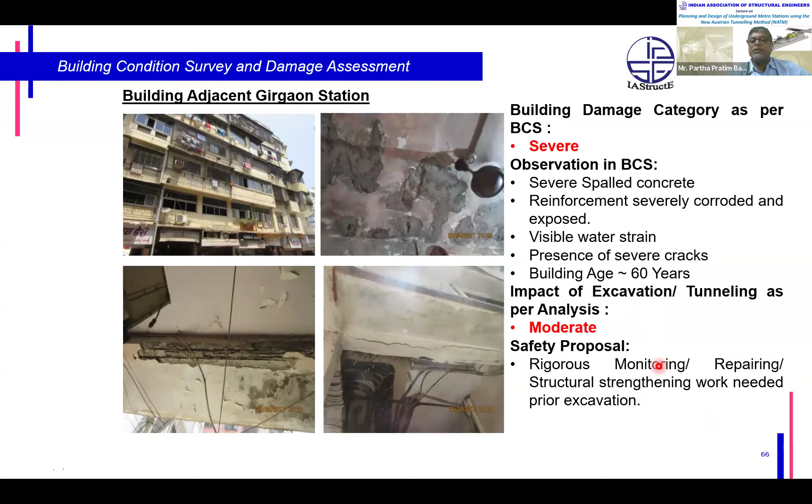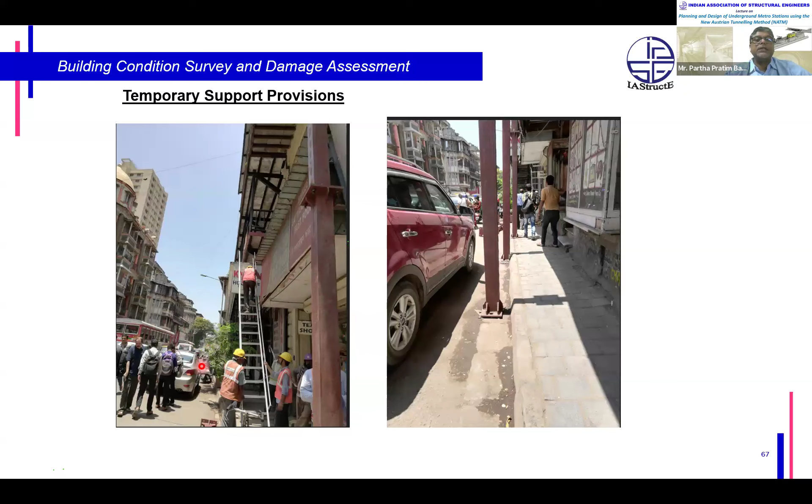Not only here, it is very important in the underground station. So I am showing some temporary support that has been provided even before starting the construction to the building. These are the strengthening measures.

Now coming to instrumentation and monitoring, I will say there are 3 levels of comprehensive monitoring adopted—at underground level, surface level, and structure or adjacent building level.

So in the NATM tunneling method, we are providing several optical targets, rod extensometer, strain gauge, and pressure cell for stress measurement, to measure what is the behavior of the primary support. And similarly, we are measuring at the surface.

There is a ground settlement marker for surface, inclinometer for lateral displacement, and piezometer for groundwater monitoring. As I said, groundwater monitoring is also very important—we need to provide recharge wells as well.

And in the adjacent building, we are providing a tilt meter for structural inclination, crack gauge for crack movement, vibration sensor for construction impact, and settlement marker for building response.

So we can see the performance observation I have shown in Grant Road, Girgaon, and Kalbadevi—the theoretical settlement and the actual settlement observed during all stages of construction. In all the cases, actual settlement was significantly lower than the theoretical prediction, which basically demonstrates the effective design, monitoring, and execution of an NATM tunnel.

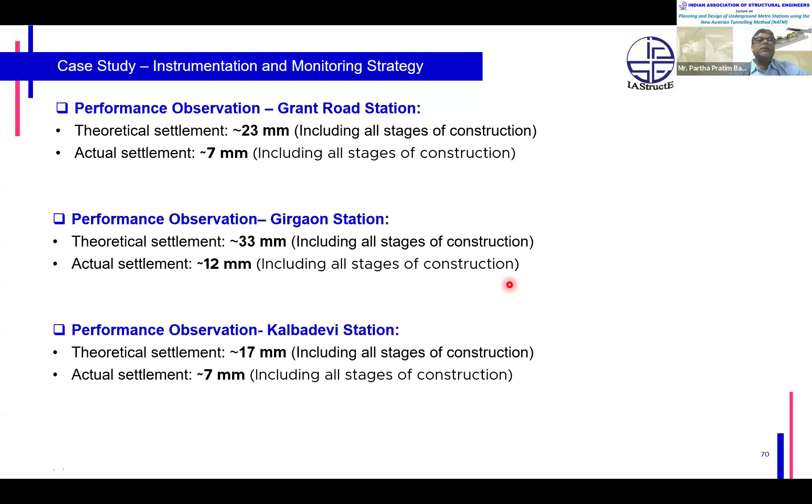Risk mitigation and control measures. Several risk mitigation steps have been taken. One is design level control, where we did FEM based analysis. Then critical zone identification was done well in advance, with predefined support classes for varying ground conditions, and design driven by predictive ground behavior.

At construction level, we have sequential construction with top heading, benching, and invert. Advance length has been controlled to limit disturbance, with immediate installation of primary support, and arresting water during excavation with grouting.

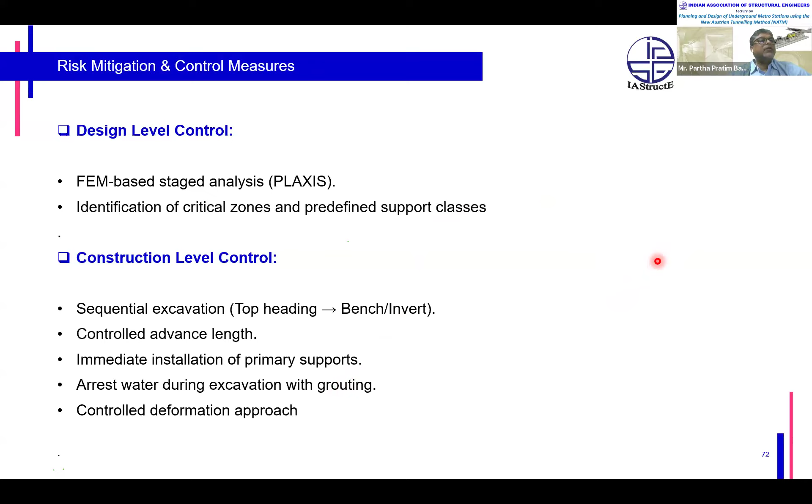This is also an important thing. Whenever water is coming in very high, we provide grouting to the excavation so that groundwater lowering is not too much. We have also done the controlled deformation approach in this case.

So for monitoring and observation, as I said, real-time instrumentation with different trigger values. There are three trigger values: alert, alarm, and action level. And if a certain trigger value is exceeded, what has to be done?

Construction should be stopped, and it has to come back to the designer for a check in the design, to decide whether to change the design or follow the same design.

There is continuous validation of design through field response, live utility protection, and a 24/7 real-time monitoring system, with decisions driven by the observational method.

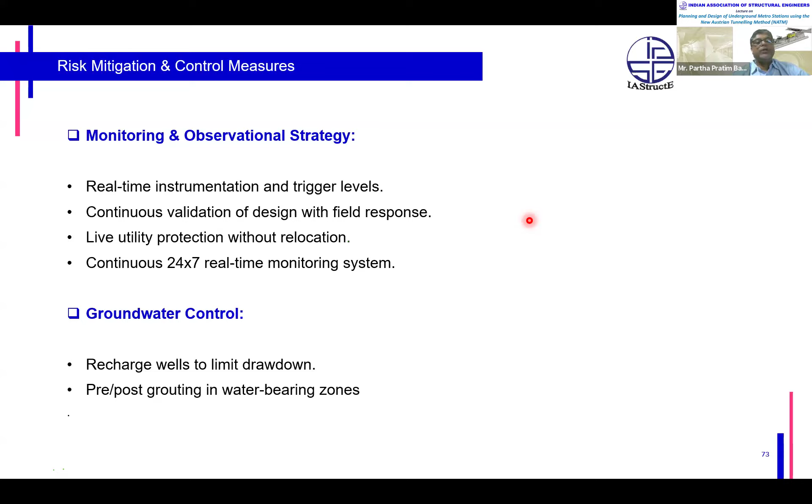For groundwater control, as I explained, recharge wells have been provided to control groundwater drawdown, with pre and post grouting in water bearing zones. Wherever there is a water bearing zone, we check the pre and post grouting, and our entire focus was to maintain the groundwater balance.

For contingency measures, we kept standby support systems and rapid response protocols. Predefined strengthening measures like lattice girder, forepoling, and grouting have been kept ready for deployment. If we require more lattice girder or forepoling, this grouting scheme has been kept as standby, and if the ground responds in a more severe way, we deploy these measures.

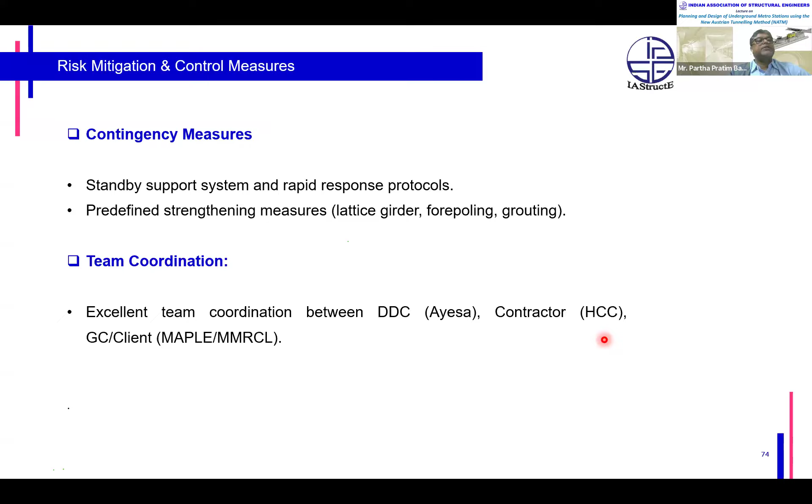There is good team coordination between the DDC, contractor HCC, and GC and client MAPLE and MMRCL. I thank the GC and client for their continuous support, and the contractor did a very good job. So strong contingency planning and exceptional team coordination were critical to managing risk and ensuring project success.

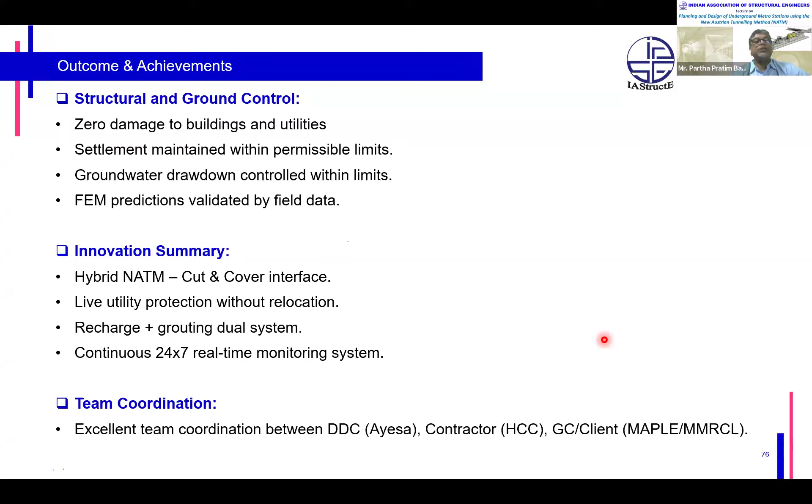These are the achievements and recognitions. This is UGC 02, recognized as the most complex yet perfectly executed section of Line 3. The entire corridor was inaugurated by our Honorable Prime Minister on 8 October 2025.

Now coming to the conclusion, what are the key takeaways? Basically, NATM is highly effective in dense urban environments, especially in rock. Real-time monitoring is critical, not optional, in such sensitive areas. FEM-based real-time monitoring should be mandatory, and FEM predictions must be continuously validated with field data. Integration of multiple construction methods is essential to overcome challenges, and early risk identification and mitigation drives project success.

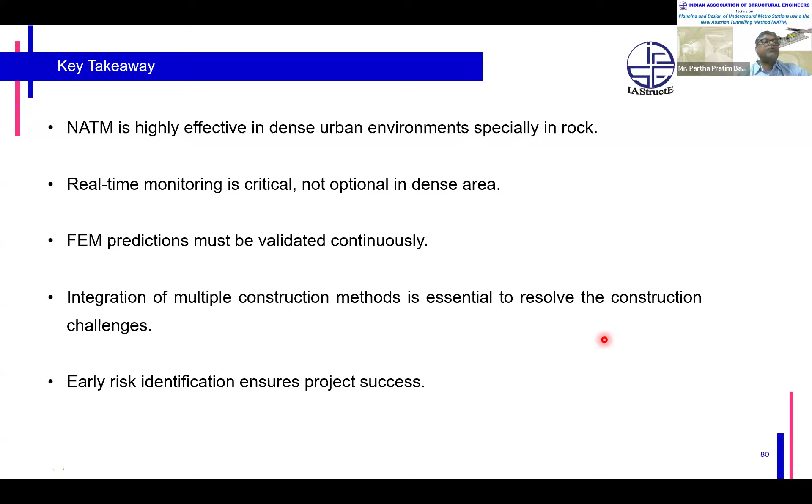So successful urban tunneling and underground construction is not just about design or construction, it's about continuous adaptation, monitoring, and proactive risk management. Thank you. Thank you very much for listening to this webinar.

Excellent presentation, Partha. Such a difficult thing because so many players are involved here, geologists, geotechnical, services, construction, planning, structures, so many things are involved.

So my question before I ask others to ask you a few questions. The basic thing comes primarily from civil works, systems, and then MEP and utilities. And finally the existing structures along the tunnel and the station, which of course you have done condition surveys for, and tried to strengthen them to make them safe.

Now, a few structures which are constructed later, what shall we do for them?

And then coming to the monitoring side, you have put 24/7 monitoring. Now the life of the structure may be say 100 years, but these sensors that we use may not last that long. So how do we take advantage of sensors that can be used for a longer time, and how to store the data and use it effectively during the lifetime? These are just a few things I would like to ask you before we ask others to question.

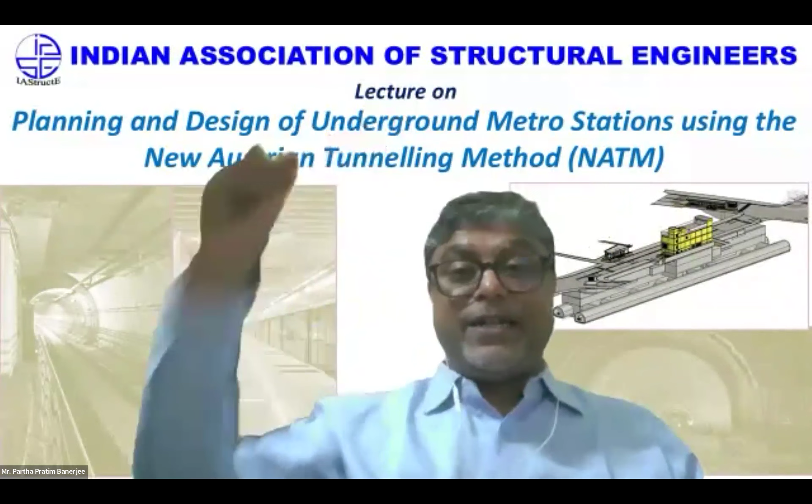And in such structures, as I saw, NATM architect is very much dependent on us, structural and geotechnical, because the geometry should be what the architect has to decide. They just tell us, I require this, I require this. So I need to start from small and then go higher, I need to go higher. So it's always space proofing to be done in consultation with the MEP and architect teams.

But at the same time Partha, as you mentioned, a good architect has a good idea about the structure also, so he knows what you are actually looking forward to. Yes sir. Same way, I think a good engineer must have a fairly good idea about what the architect has in his mind. This applies not only to underground structures but also elevated structures, metro station buildings, whatever you call it, even buildings. A successful engineer is one who can gel with the architect and understand the architect's requirement also.

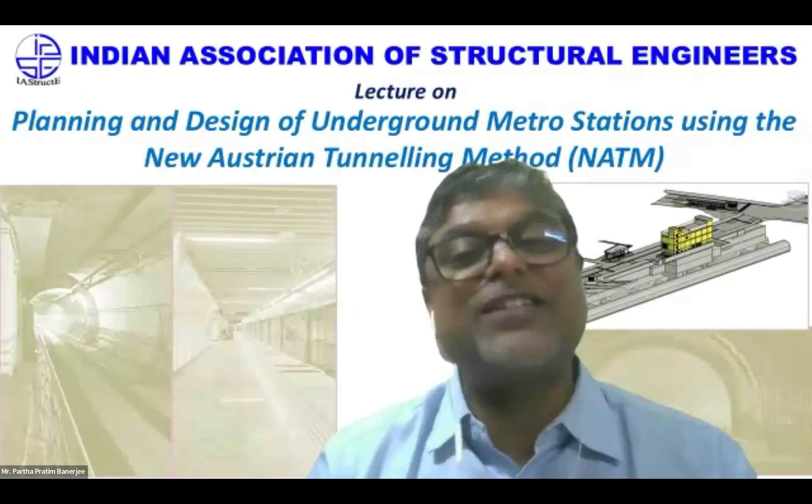Yes sir, because we are making the civil infrastructure for the train to run and for the passengers, so we need to understand the services, architectural evacuation, all the requirements also. Otherwise it's very difficult, otherwise we will say 'Arey, cut out, why should we get cut out, why is he asking for cut out?' But cut out is part and parcel of such type of structures. Absolutely, yes, absolutely, thank you.

I think Partha, I must once again thank you for such an excellent presentation on such a difficult subject. Thank you, sir.